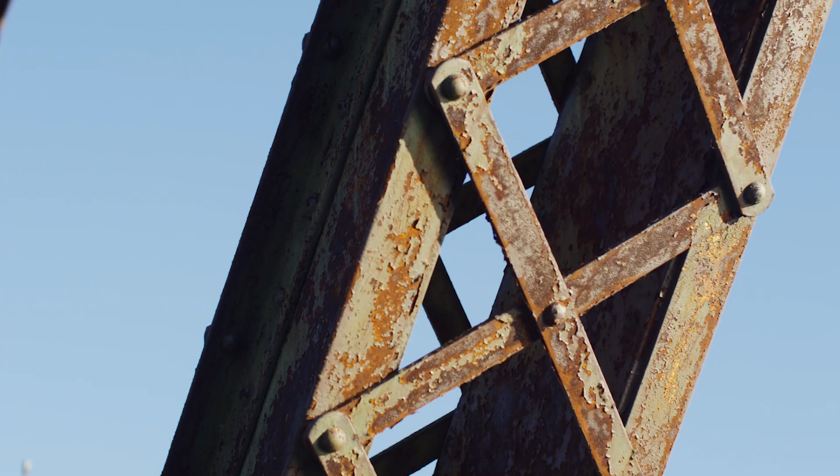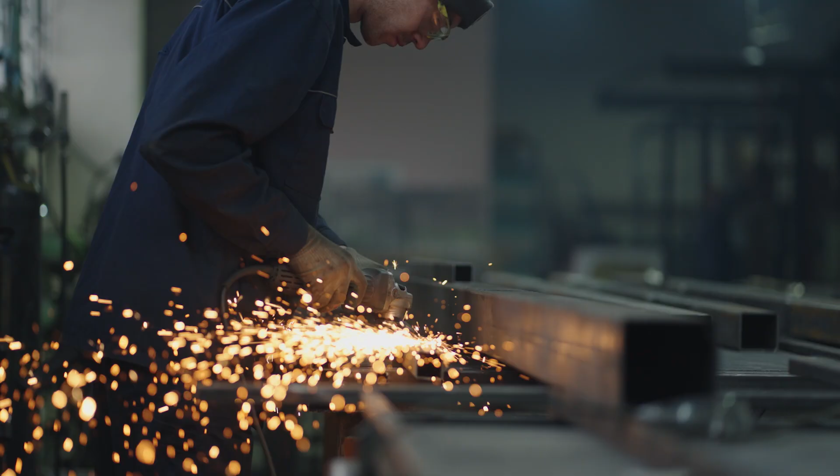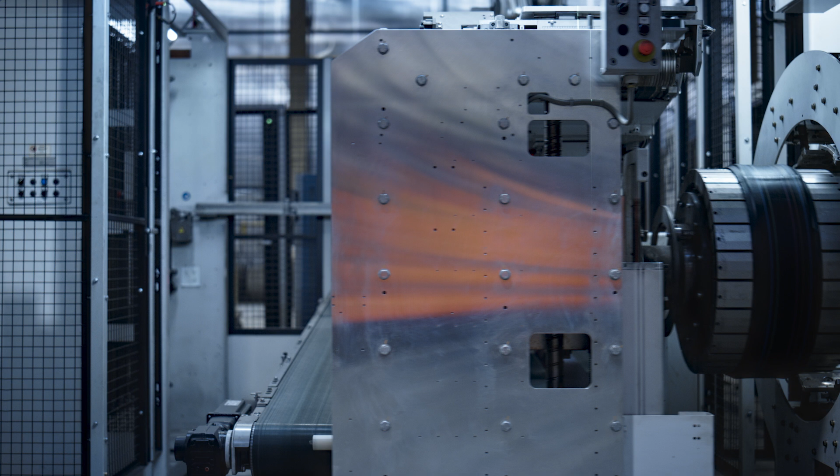In ancient ages, steel was mainly used for the production of weapons and simple tools. Steelmaking has evolved over the years towards industrialization, permitting high quantities of steel to be produced. Steel has heavily influenced the growth of the world economy, and the world economy has influenced the improvement in steel production in terms of raw material savings and energy saving per unit of steel produced, as well as increasing the characteristics of steel available and the number of steel grades that can be produced.

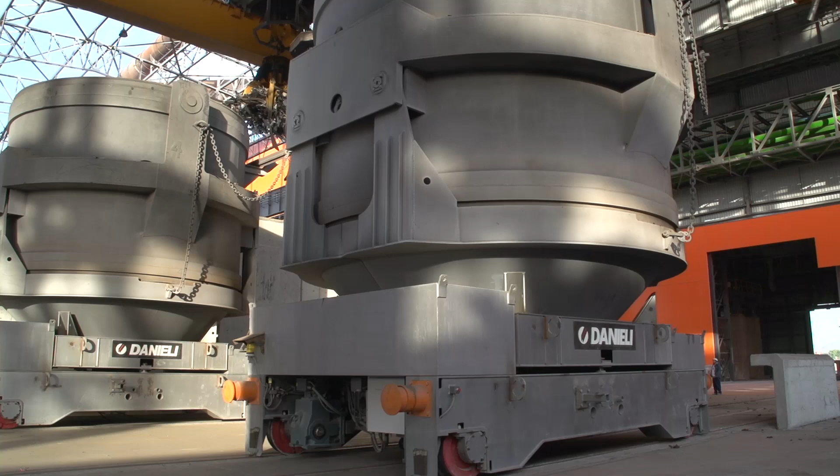More than 6 million people are employed in steel manufacture, and 49 million jobs are related to the steel supply chain, with an added value of $1.2 trillion.

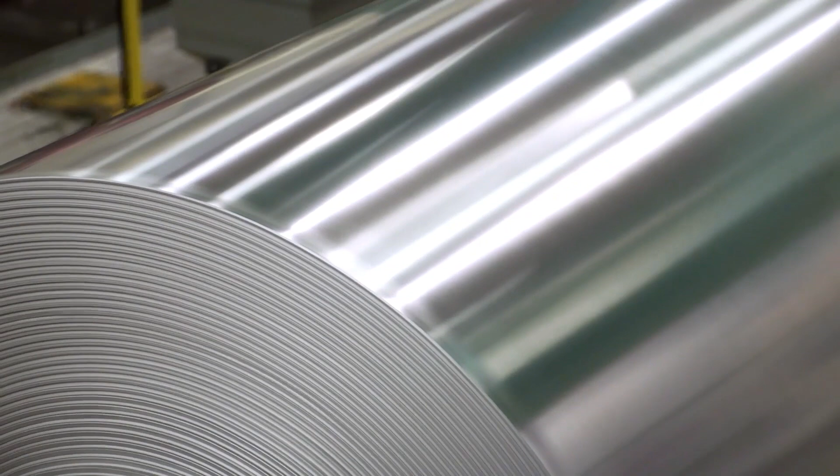We have the knowledge from iron ore, from scrap to end products. We have the knowledge to design and manufacture equipment A to Z. What does it mean for us? It means that we start from the design of a concept, how you can start to produce any finished or semi-finished products, but starting from raw material. So practically we have all the concepts, how to design the machine and make the process to handle the steel industry products.

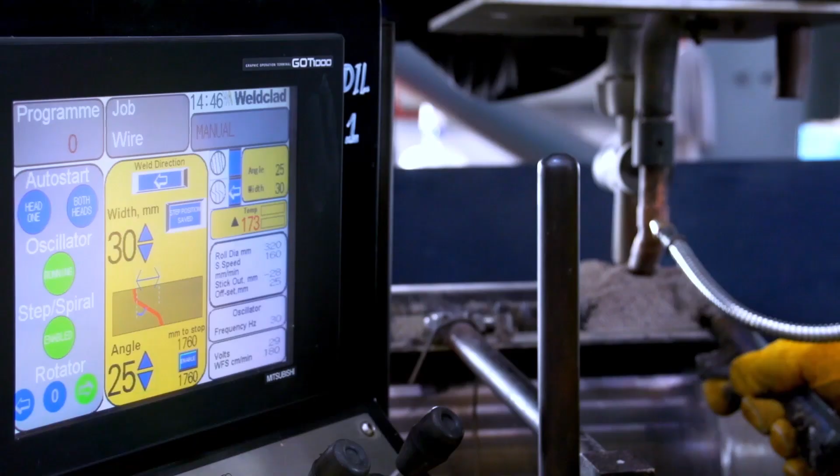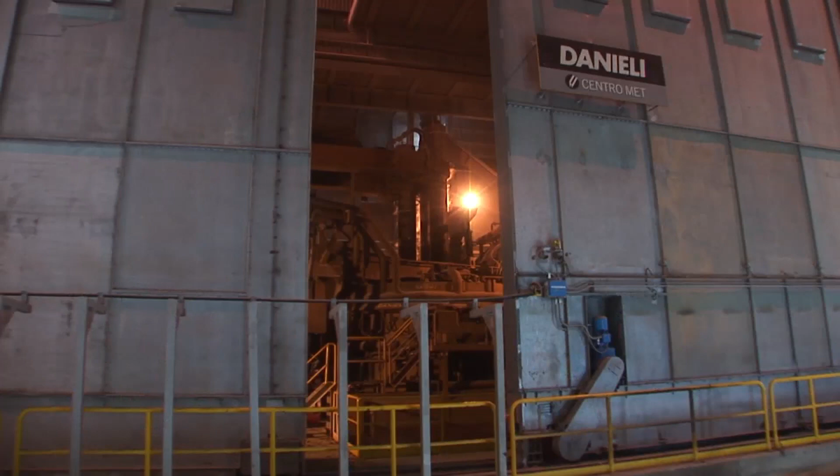Danieli has always invested in research aiming at optimizing steel production. It means reducing the production cost and increasing the productivity. These actions are strictly correlated also to emission reduction.

Having products like Q-One, we can create a very big network inside the factory. This factory network can be in DC, for instance, and this is a very good method to share and control the energy with certain intelligence, to optimize the consumption based on time, based on availability of power, based on cost.

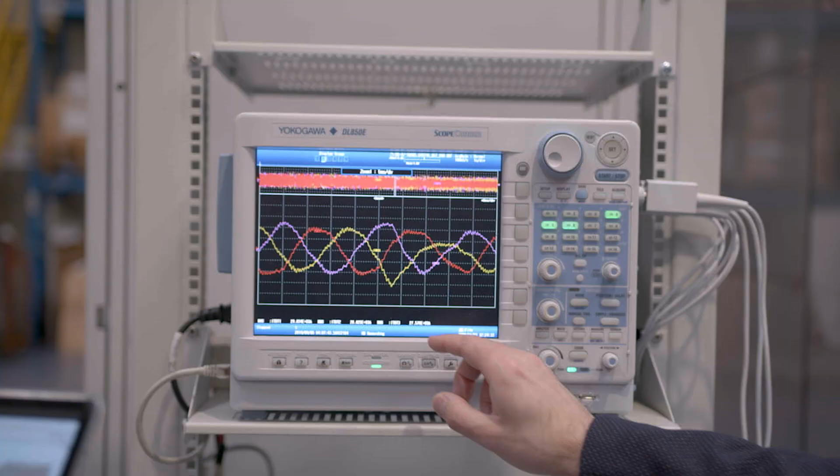With our system, all types of renewable power plants can be connected via a dedicated bus, not only to the main electric arc furnace, but also to other high power demanding loads, maximizing the usage of the renewable resources.

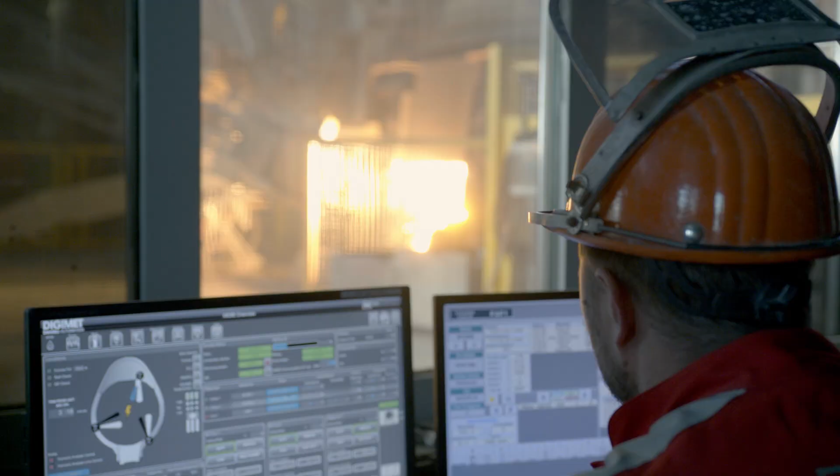We are, however, talking about the electric arc furnace, where electrical energy is the major power source of the furnace. So it is mandatory to optimize the way this energy is transferred and used to melt the raw materials. And here is where the Q-ONE enters, not only by reducing the losses from the power source to the tip of the electrodes, but also by providing a full new range of operating parameters that enable us to conduct the melting in the furnace in a totally different manner.

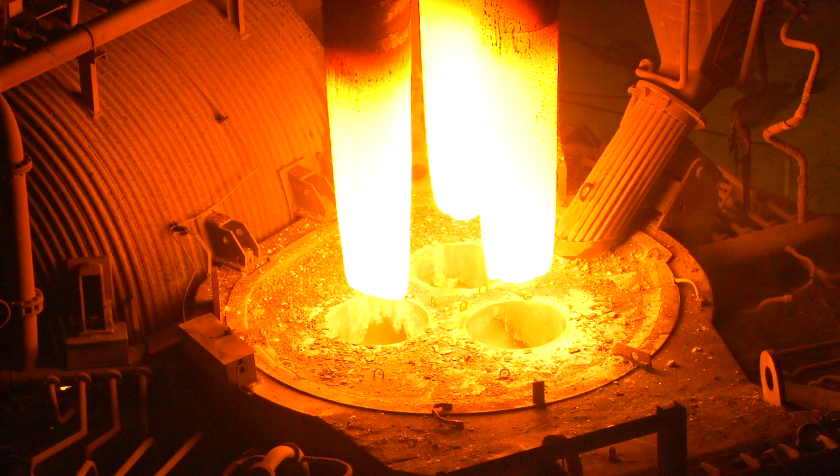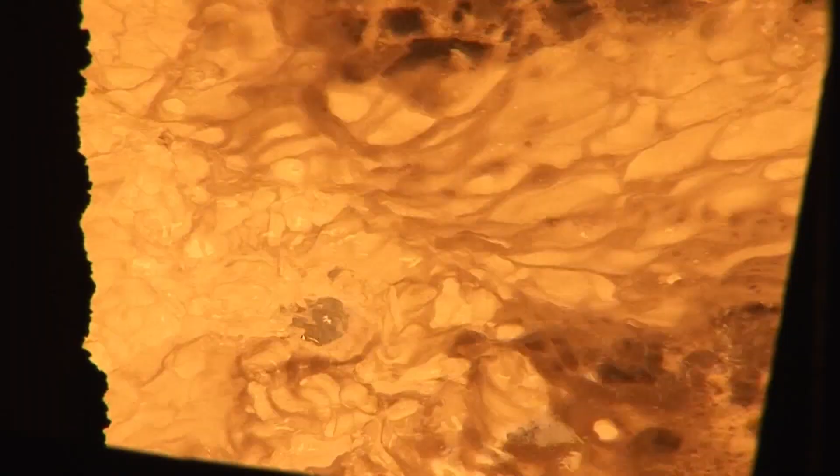You have to imagine that the electric arc furnace is a large pot with a refractory inside. You charge the scrap, you have 3 electrodes bringing the 3 phases of the energy, going down, starting up, creating an arc. This arc energy is melting until the steel is liquid.

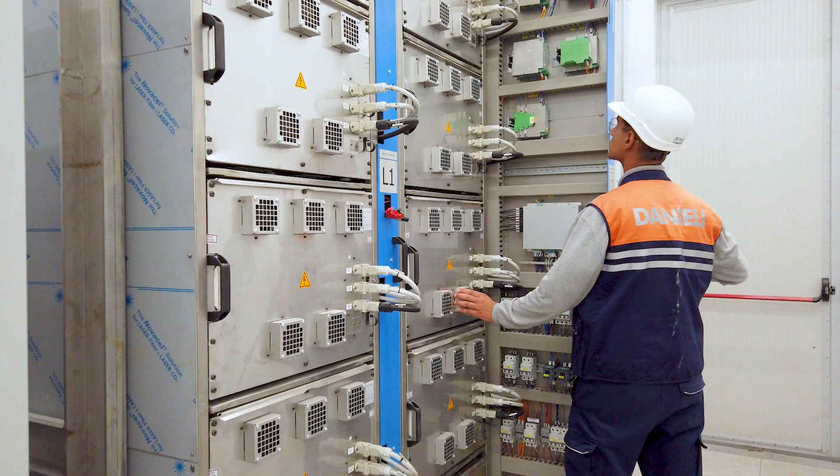What we did with the Q-ONE, we converted the energy coming from the network from AC to DC. We have a very big buffer of energy localized close to the furnace. And then we convert again DC to AC. At the time you convert, you have the control.

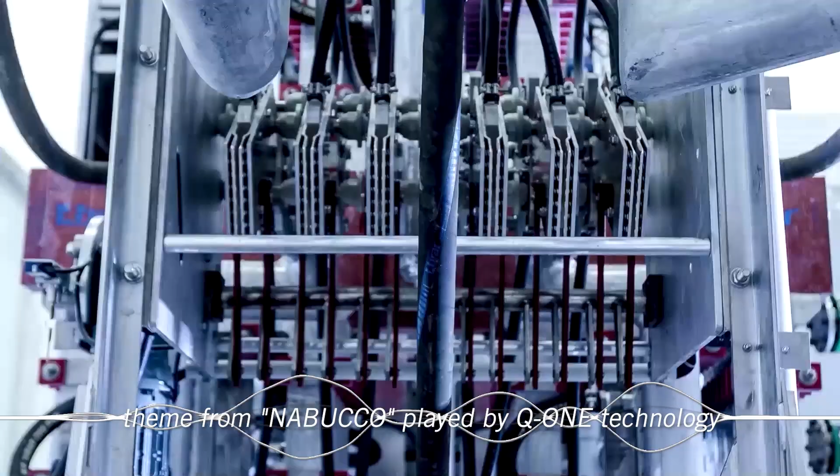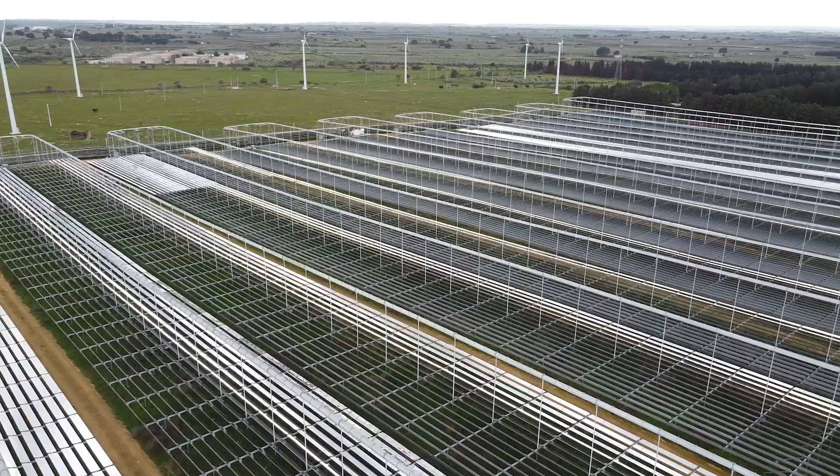When we learned that a transformer that could save energy had been developed by Danieli, we decided to install it. Tokyo Steel manufactures steel products from scrap. The company boasts extremely low CO2 emissions. We aim to be carbon neutral, reducing CO2 emissions by 60% by 2030 and by 100% by 2050.

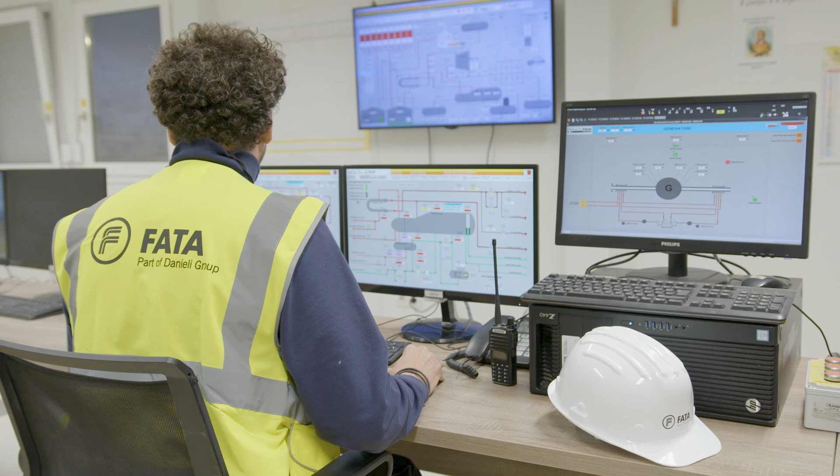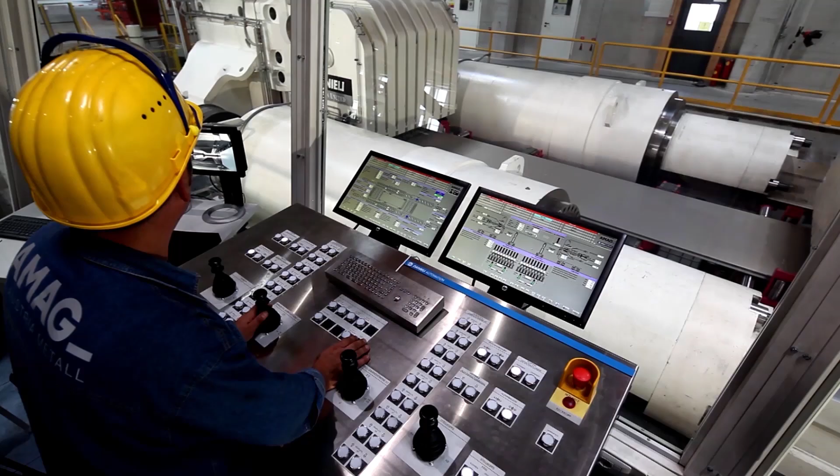カーボンニュートラルを目指してます。 Artificial intelligence is something that is a dramatic fast automation. So today we call it artificial intelligence. In reality it is a lot of microprocessors, a lot of maths to move, run, operate a very fast process. Sure, I think artificial intelligence is something that is a must.

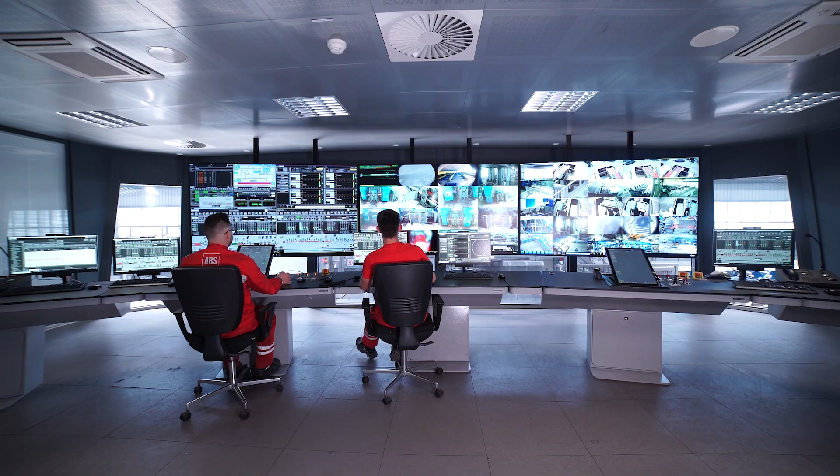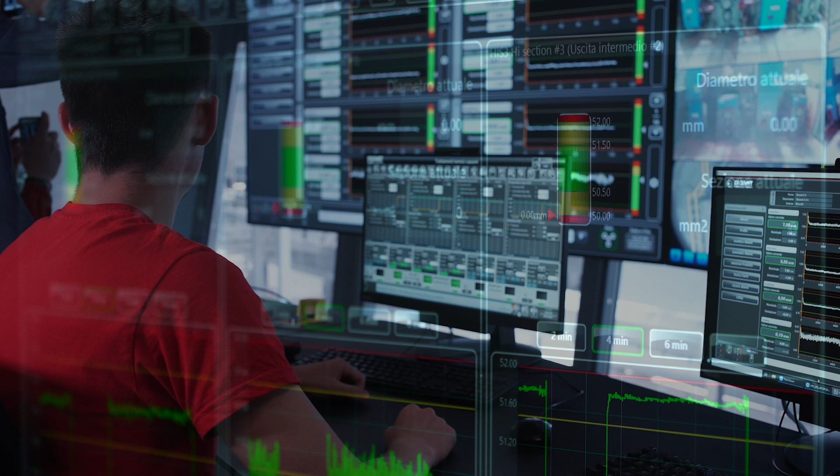Innovation is in the DNA of Danieli. Innovation is also related to customer care, because challenges and problems of our customers are also problems and challenges for us. The development of the control software was one of the toughest jobs for us. That was possible only thanks to the passion that moves this team and the always productive cooperation with our local universities.

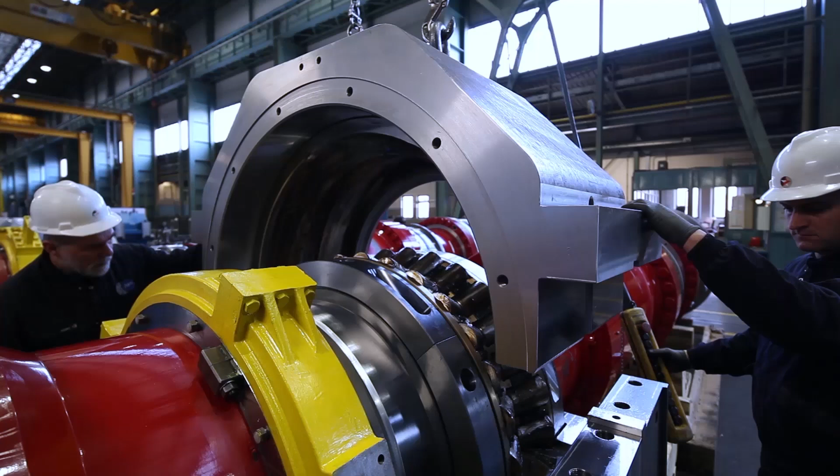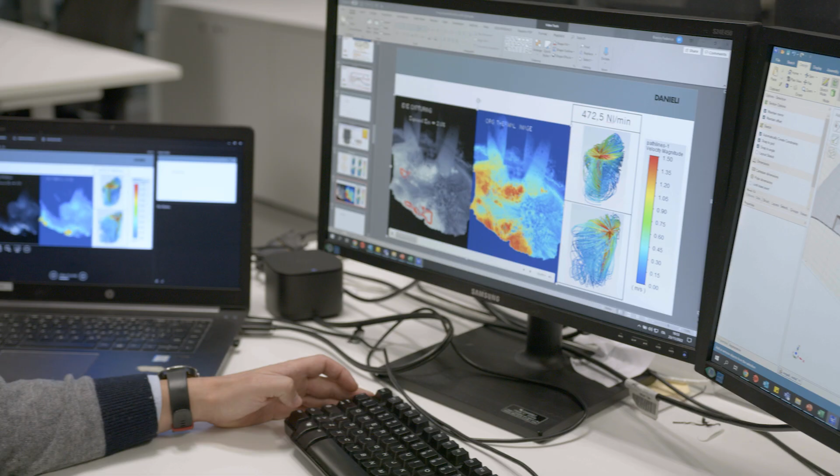Electrification and digitalization are two key pillars for sustainable steel production. Electrification means to change the equipment and the processes, switching from direct use of fossil fuels to electricity. Digitalization means to convert the physical processes into what we call digital twins. And in these ways, it's possible to use our software and process knowledge to have full control of them.

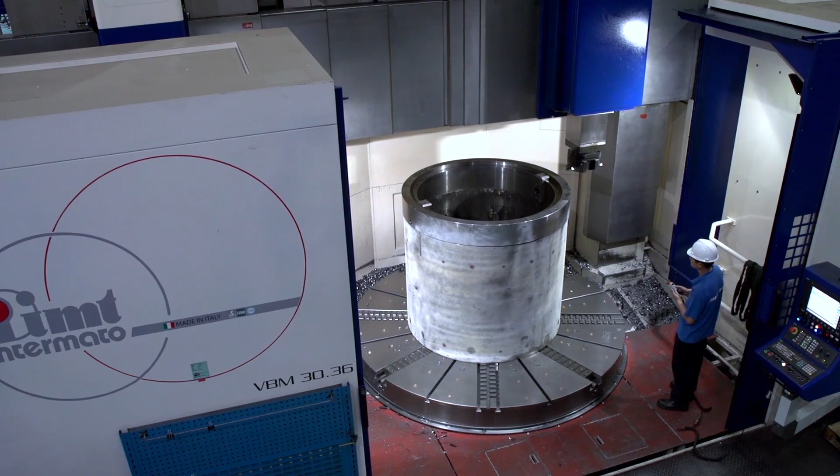Danieli will continue to innovate the industry with the same passion, motivation and curiosity that is the elixir of our success in the last 100 years.

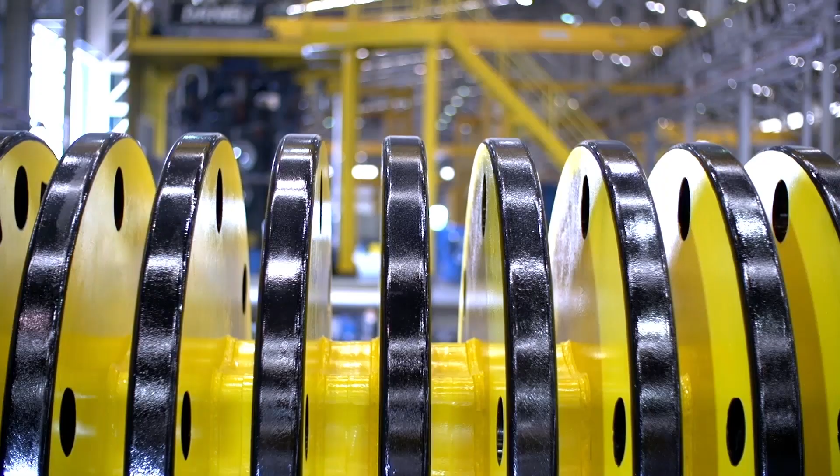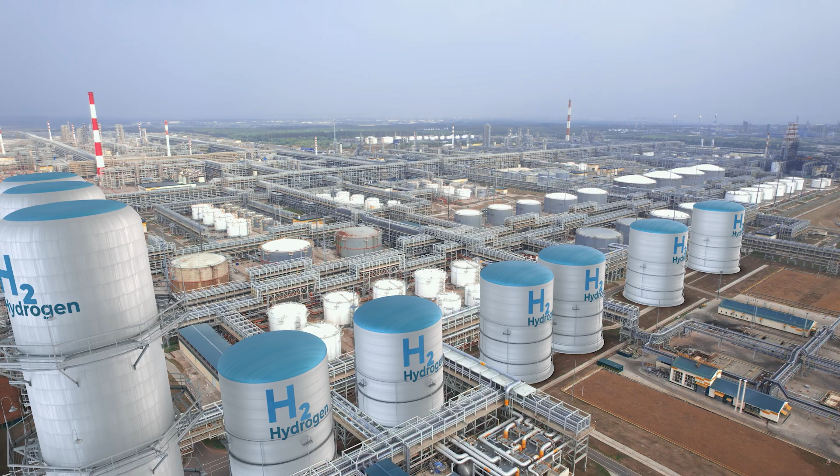So power on, power off, very big loads, hydrogen, battery storage, solar, wind. This must be a kind of very huge, intelligent energy package, where we are working for the future.